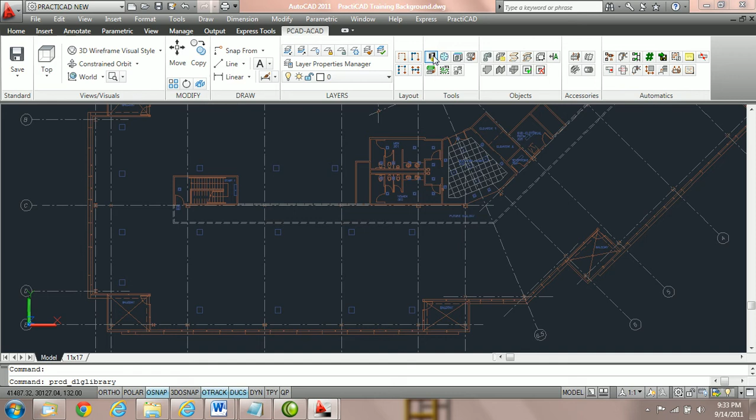Make sure you go into the ductwork options and let's check all the same boxes. For options, we should make sure that check in-out attachment is checked. It's recommended that this is always checked. Allow incompatible connectors: it's recommended that this is always unchecked. So currently uncheck it. For duct line placement, it's recommended to have everything checked as we do here. Size read only is up to you.

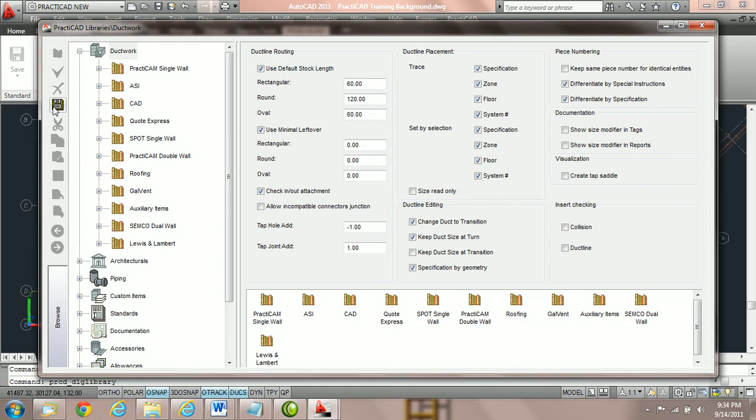And to start, let's put our duct line editing options on change duct to transition, keep duct size at turn. I've got keep duct size at transition unchecked, and very important, specification by geometry is checked. Though the first three are preferences, this one I think should be checked all the time. Once you've got everything all together, if you've made any changes, you'll see the save key pop up. Click save and then exit out of your library.

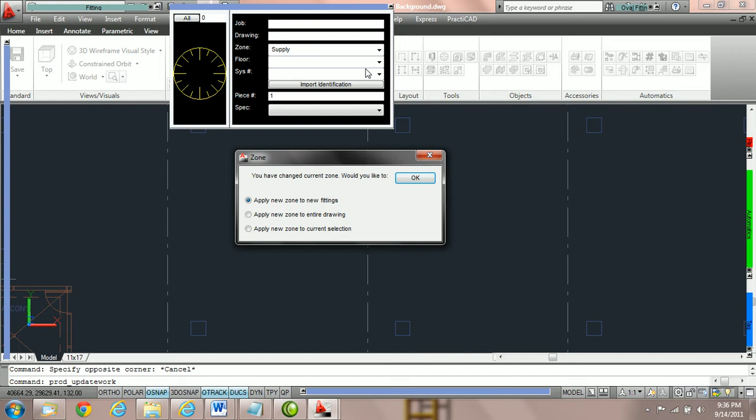Now we're going to zoom into this section of the drawing, and let's focus on this quadrant right here. Now first go into your workbox and choose a zone. We're going to choose a zone supply, and then we're going to choose a specification. I'm going to choose 2-inch water gauge.

Remember that your specifications and zones might be different than that of this tutorial. So as long as you have 2 in the drop down menu, you should be fine. For this exercise, I'm going to grab 2-inch water gauge and say apply to new fittings. Now we need to go into the fitting box and grab a piece of rectangular duct. You should see the specifications if you have them already applied.

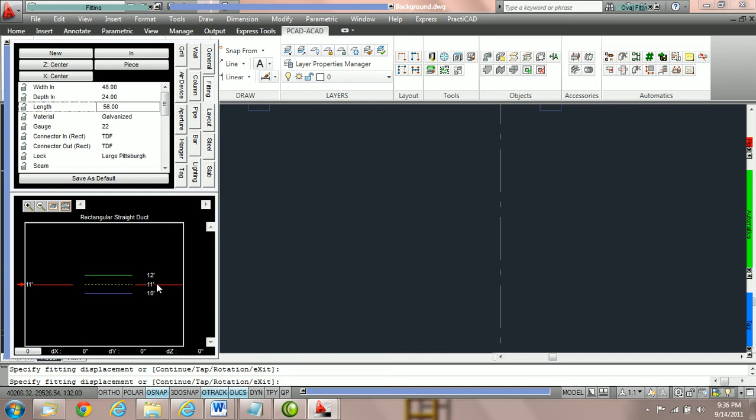We're going to go into width and choose 48 by 24. And then let's give it a height of 10 foot bottom and hit enter. Now we're going to place the duct on the drawing. Click once to start your rotation. Might help to have polar on. I'm going to turn polar tracking on.

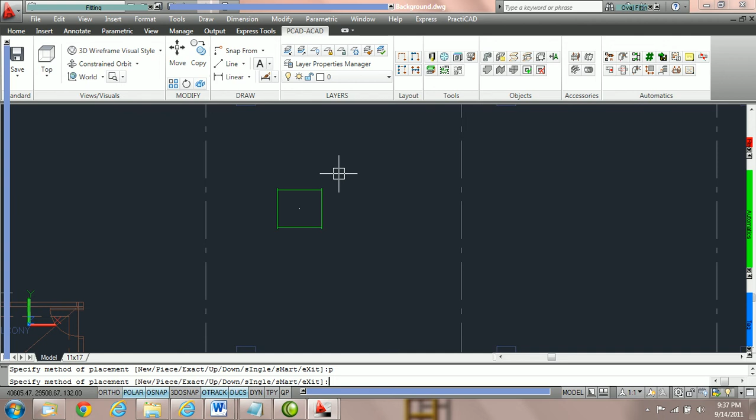Click a second time to accept rotation, and then you should see the routing methods. The last thing you see before you're one click away are the routing methods. So I'm going to click one more time. I'm currently routing with piece to put one piece on the drawing. So you could also hit P, spacebar to route with piece, and then click once, and your fitting should be on the drawing.

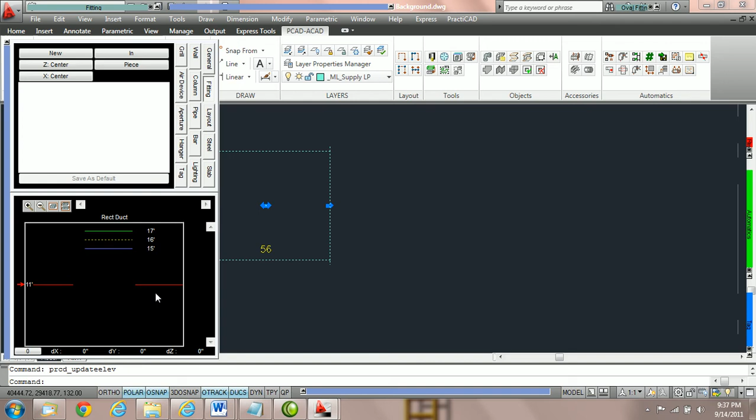Now first, to change the elevation of the entity, what we're going to do is just click on the entity, go over to your elevation box, and just change it to 15 foot, hit enter, and you would have successfully changed the elevation of that one entity.

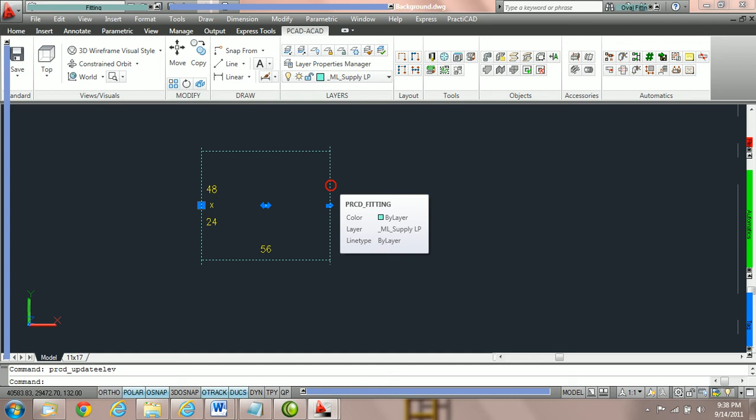Now we're going to edit the duct in 2 ways. We can either do it from the edit fitting window, or we can do it from the AutoCAD property box. So let's do it from the AutoCAD property box. To start, either double click on your fitting. I'm going to do that now. Or you can right click and go to properties, and that'll open up your AutoCAD property box. Here, let's just change the geometry parameter. Change the width in to 36 and the depth in to 18.

Now what we're going to do is go over to the fitting, and we're going to make changes to the connectors, but let's do this using the edit fitting option. Right click on the fitting after it's selected and go to your edit fitting option and check it. A little window should open up, and I'm going to put my fitting in southwest isometric view by clicking right here. And you should have all your parameters unlocked.

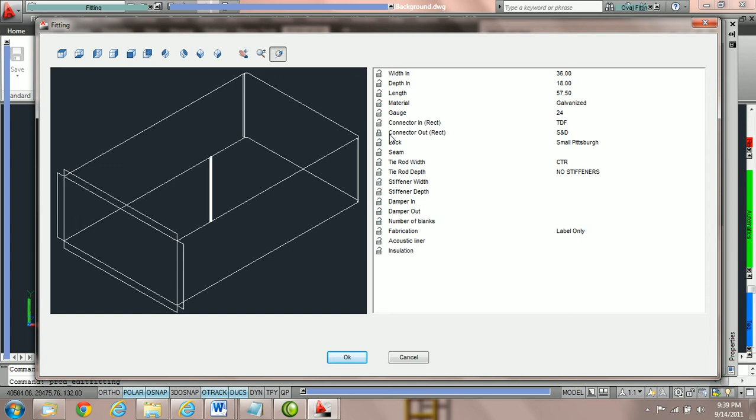Let's take the connector out and switch it from TDF to slip and drive. On my computer it says S&D. Your data might be different. But let's just change the connector out to slip and drive. And let's lock down that parameter. Just that one parameter. And once you've done that, let's press OK.

Now, go into your AutoCAD property box and try to change that connector from S&D back to what it was. I'm going to try to change it back to TDF. If you do it, you should see that it is impossible to change that connection. If we want to change that connection now, we need to go back into Edit Fitting.

So once you've tried to change it and you've been unsuccessful, let's right-click on that fitting again and go into Edit Fitting. And then let's click on that connector, the connector out, and change it back to TDF or whatever connector you had it at first. And then press OK.

As you can see, editing the fitting is very easy. Locking connections is also a very useful and easy feature to use. An area you might want to use edit fitting would be if you need to change a connection for some reason and you think you might edit the fitting later and you don't want that connection to change back.

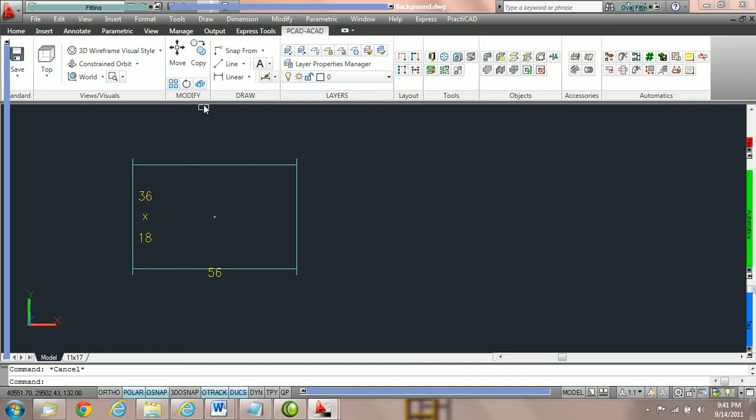For example, let's go through an exercise where we're going to grab another piece of rectangular duct. Grab another piece of rectangular duct out of your fitting bin and then hit C spacebar for continue and place it on the drawing by clicking once, and then I'm going to hit escape to let go of the fitting.

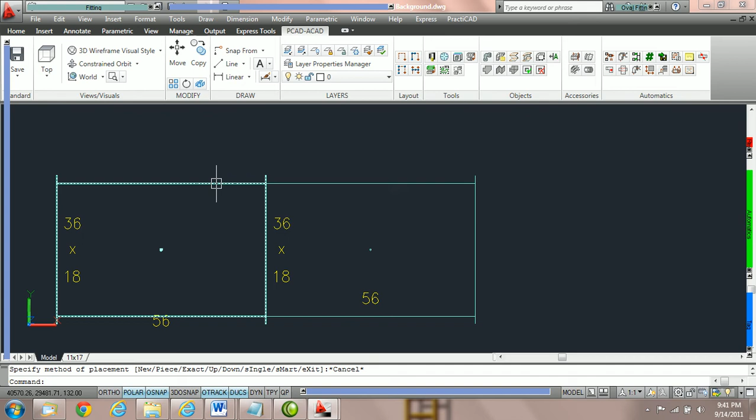Now, let's click on the first fitting and then double click for the AutoCAD property box. Change the connection out to slip and drive, or some connector that you've got in your data, of course. Once you do that, you should see that PractiCAD will change the other connector to match.

Now, this is all about the compatible connectors, and there's separate tutorials on that, and the fact that we have the option that doesn't allow us to attach connectors that are not compatible. So that's why we changed that for this exercise. Now, if we knew that we would want to hold these connections to slip and drive, even if we go to edit the duct later, we'd want to lock down these parameters.

Currently, click on the first duct on the left and then change the parameter to 42 and hit enter. And when you do that, notice that PractiCAD has now reapplied the specifications that are active, and it's probably added a TDF connector back onto your fitting. So what we're going to do is we're going to now reapply specifications, but we're going to do it with the connector locked. So change that connector on the out back to slip and drive.

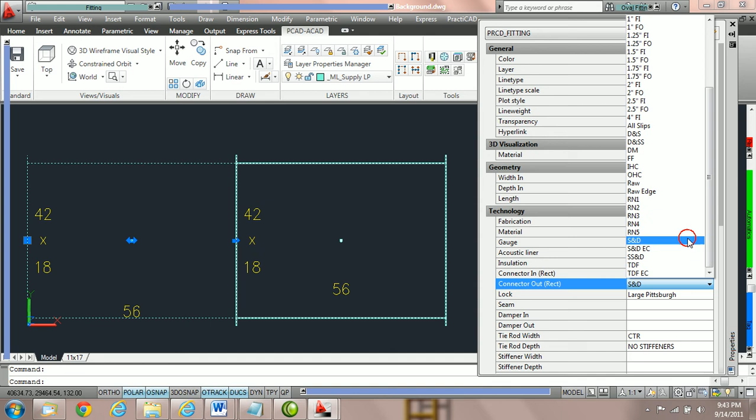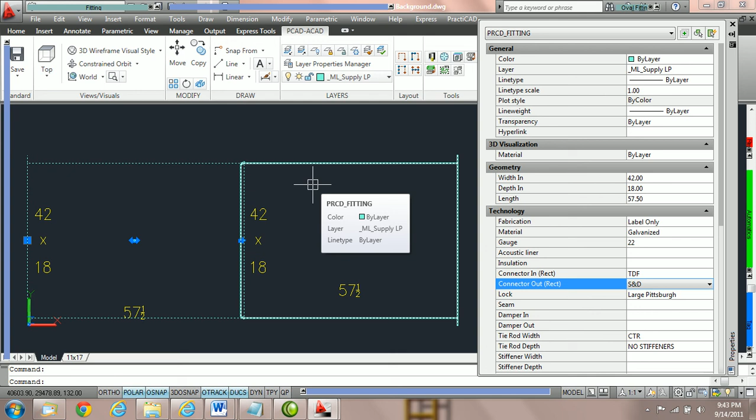And once you've done that, let's right click on that fitting and go to edit fitting. And let's lock the connector out down. And then let's press OK. And then hit escape to let go of the first fitting. And then click on the second fitting, right click, and go to edit fitting. And lock the connector in of that particular connector, so it's locked down to slip and drive. And press OK.

Now what you're going to do is click on both fittings. Now before we edit anything here, I want to point out something that's very important. PractiCAD and AutoCAD both will only show you properties of identical items. It can show identical items that have different parameters, and you'll still see the list as you see here. For example, we have two fittings. They are identical in terms they're both rectangular duct fittings. So the entities are identical.

But you can see that all the properties that they have the same, that are identical, show up in the property box. However, you can see that the connectors are different. The connector in and the connector out are different for each one. So whenever you've got two like items highlighted with properties that are different, PractiCAD shows the word varies. That's always an indicator that these properties are different. And you can globally edit in this section if you're highlighting two identical items.

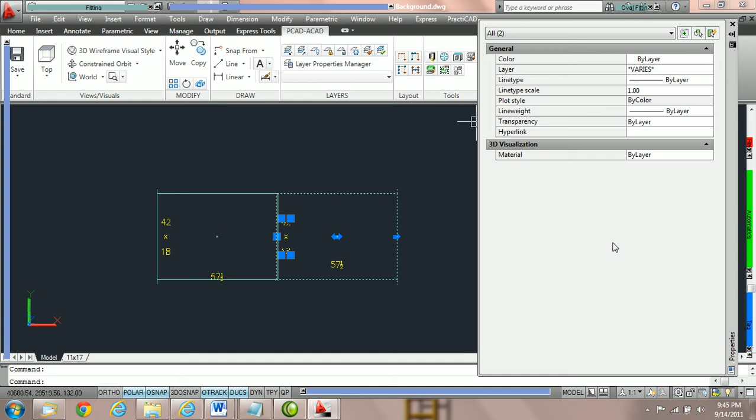However, if you're highlighting two different items, for example, a tag and a piece of duct, these are two different entities. You can see that in the AutoCAD box it says all two. And notice that we don't have properties at all because the property box will only show us the properties for one entity at a time. So if we want to edit the duct, we have to make sure just duct is highlighted. However, we can have two pieces of duct highlighted, and if they have parameters that are the same, it will show the property box. But if the parameter values are not the same, it's going to say the word varies. So it's an important note.

Once you've got two fittings highlighted again, let's go back to our specification table and let's change the spec. I'm going to say 6-inch water gauge and say apply new spec to current selection. And we're going to press OK. And once you do that, pay attention to the change. You should notice that nothing should change, because the connection should stay the same because we locked those connections down. However, you can see by going into the workbox that we have changed the specification. You can also see by going into technology parameters that the specification is 6-inch water gauge.

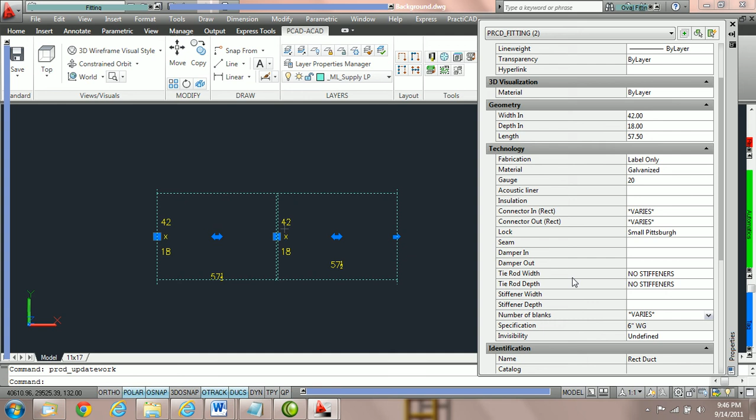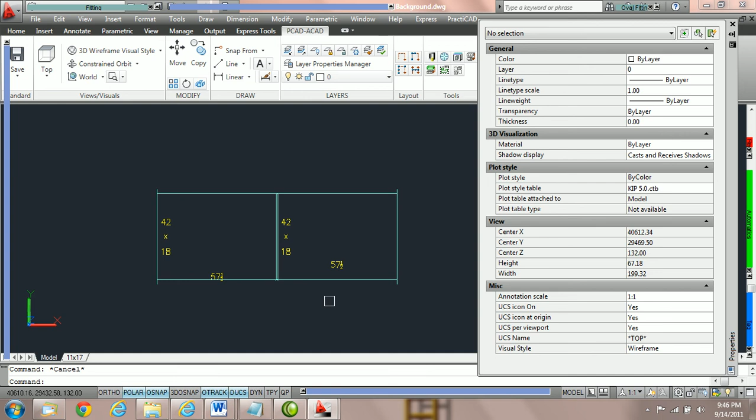So let's do the same thing, but let's undo those connections. Let's right click and edit fitting on both. Connector out, we're going to unlock, press OK. And then we're going to click on this, right click, edit fitting, and change it. Notice that I can only use the edit fitting for one item at a time. Now we're going to highlight the duct again. Let's go back to the specification, and I'm going to go back to 2-inch water gauge and say apply to current selection, OK. And you can see it's added those connections back to where they were.

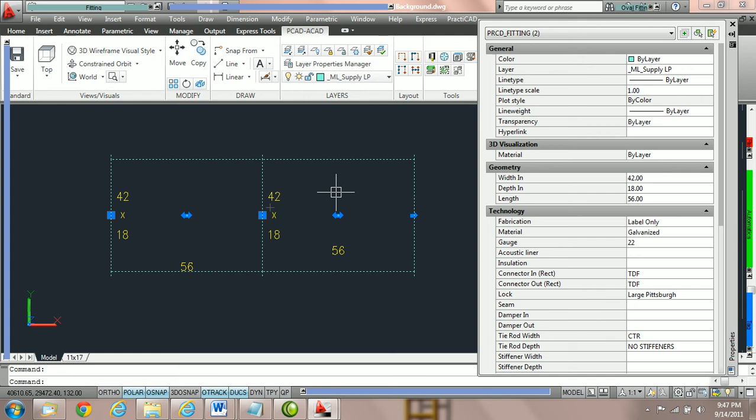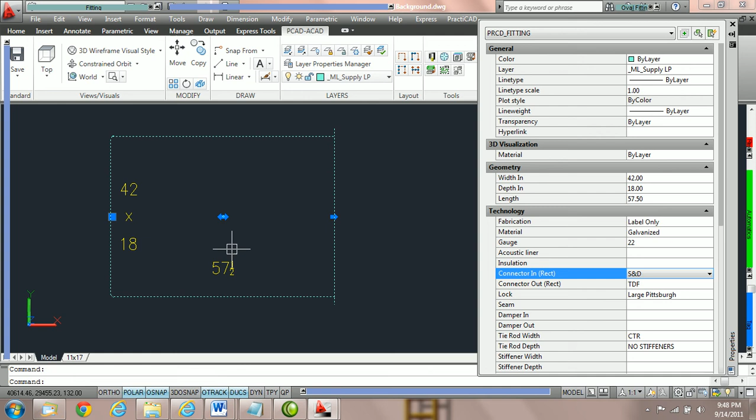Once we've done that and we've gotten used to the exercise and using the locks and editing through the properties box and the elevation and the edit fitting window, let's go over the fabrication level. Just delete one piece of duct. Then double click on it and make sure that you've got the AutoCAD property box open. And take note of the fabrication level stating that it's label only. If it's label only, you should notice when you go to change connector to S and drive, it should adjust the length as it's done here in this exercise on my screen.

I'm now going to change the connector out to S and drive as well. And notice that it changes the length to 59. Whenever you're in label only, it should always adjust the finished length to match the connectors. Notice if you now go into length, change it to 48 and hit enter, you should see the fabrication level switch to cut and label. And that's because this piece is no longer going to fit the coil line. It's no longer a stock size fitting. So now it's going to go to the plasma cutter and therefore it's going to say cut and label.

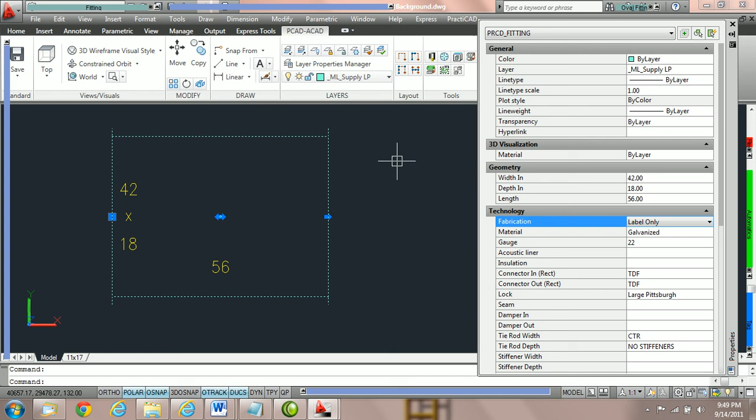If you switch this back, and let's change it back to label only right now, you'll notice the fitting goes back to a full size fitting that's going to match the default stock options you have in your ductwork options in my library. And there are tutorials on that. Okay, that's going to conclude the first portion of our duct line editing exercise on single fittings.